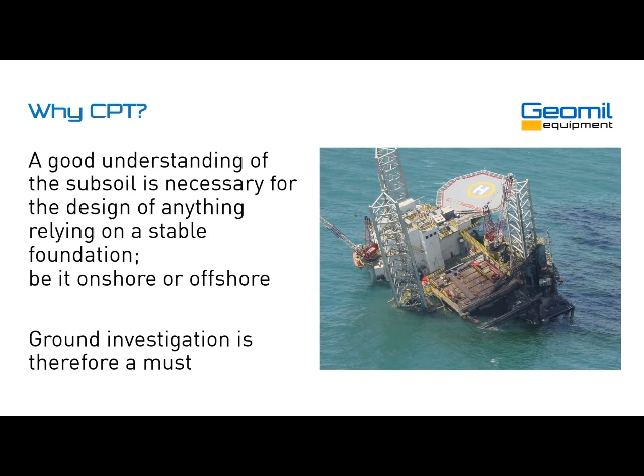So, to start off, why is the CPT important? Why is the cone penetration test important? Well, very generally speaking, a good understanding of the subsoil is necessary for the design of anything that relies on a proper foundation, whether onshore or offshore. This conference focuses on offshore, so we will also focus on that. In short, ground investigation is a must for any construction project.

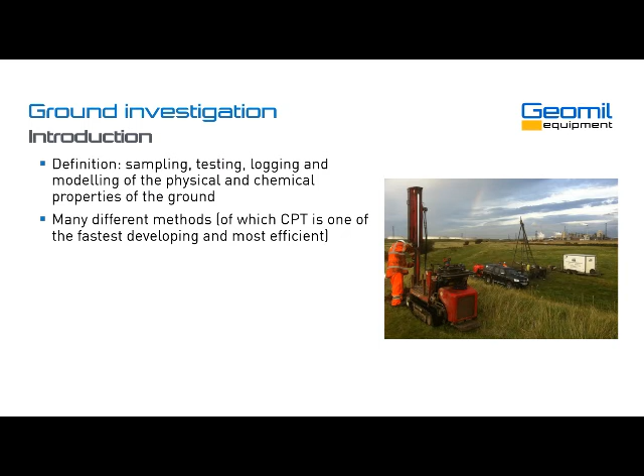If we want to understand the importance of the CPT, we have to look at the bigger picture of ground investigation. If you look at the definition of ground investigation, it is sampling, testing, logging, and modeling of the physical and chemical properties of the ground. There are many different methods to do that, and the cone penetration test is only one of them. It is one of the fastest developing and also one of the most efficient methods.

You always have to keep in mind that the best ground models are created by using a combination of methods. So even though we, as a CPT manufacturer, will obviously advocate for the CPT, it is only one of the methods, and I always say you should never rely on just one method. You should always use a combination.

It's important to keep in mind that ground investigation typically only accounts for a very small percentage of the total construction cost. More importantly, it is wise to invest in investigation upfront, as it will lead to lower construction risk, and therefore, at the end of the line, less cost escalation. So don't be penny wise, pound foolish, but do budget for a proper ground investigation.

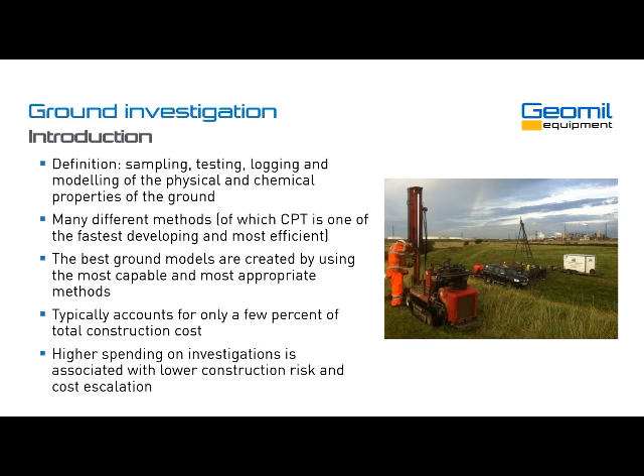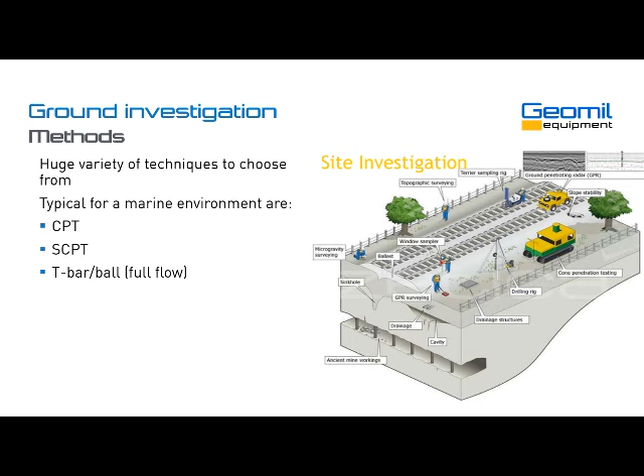Now, once again, there are very many methods for ground investigation. There's a huge variety to choose from, but typically for a marine environment are the CPT, the SCPT, the seismic CPT. Another combination with CPT are the full flow penetrometers, such as the T-bar and the ball, shear vane testing, drilling with coring or sampling, pressure meter testing, packer testing, and obviously also geophysical testing. There are probably quite a few more, but this is a summary of the most common methods.

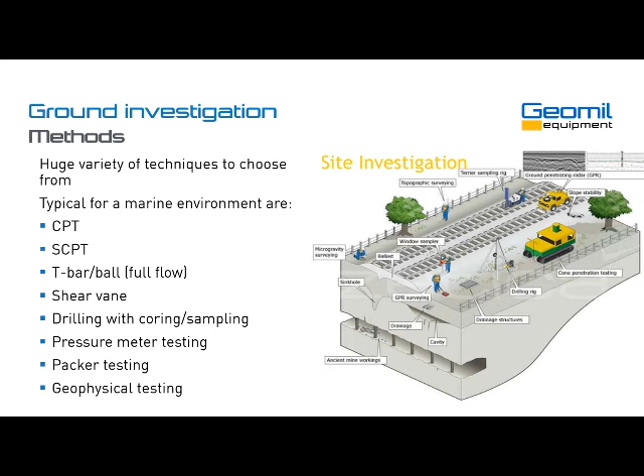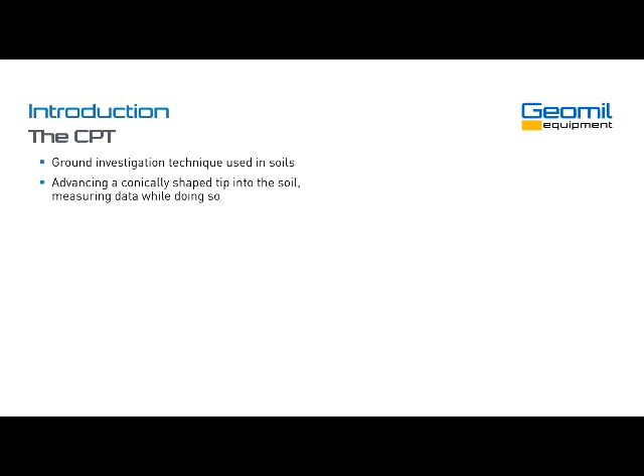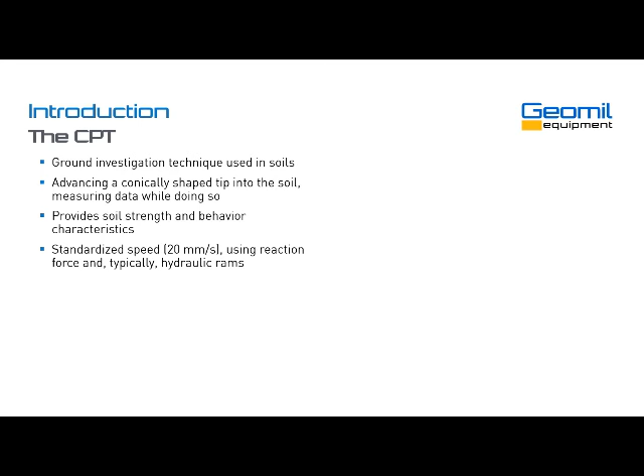Now, for those who don't really know what CPT is, a very brief introduction. The CPT is a ground investigation technique used in soils. It's not suitable for rock, but in soils it can be used. It constitutes advancing a conically shaped tip into the soil at a constant speed, and you measure parameters while you do so. It provides soil strength and behavior characteristics. It uses a standardized speed of 20 millimeters per second. You use reaction force to push the cone into the ground, and typically hydraulic rams, although for some offshore applications we use different technology. But the vast majority of systems use hydraulic rams.

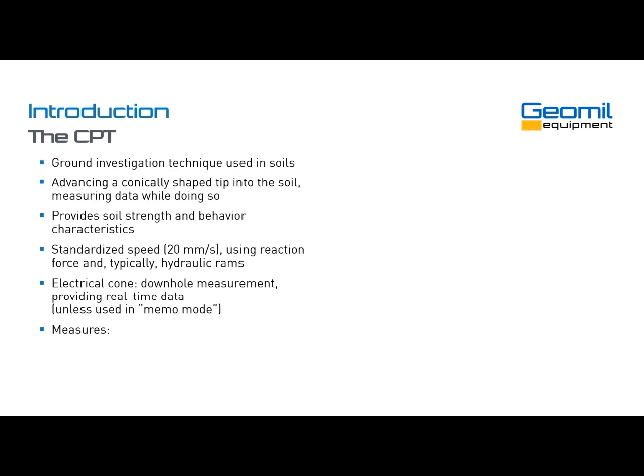We use electrical cones nowadays; mechanical cones are something of the past. Electrical cones allow for a downhole measurement, providing real-time data, unless used in memo mode, which is a special application. It measures three basic parameters: cone resistance QC, sleeve friction Fs, and pore pressure, typically U2, where U2 stands for the filter location. I won't go into too much detail, but the U2 position is typically the default position of the filter.

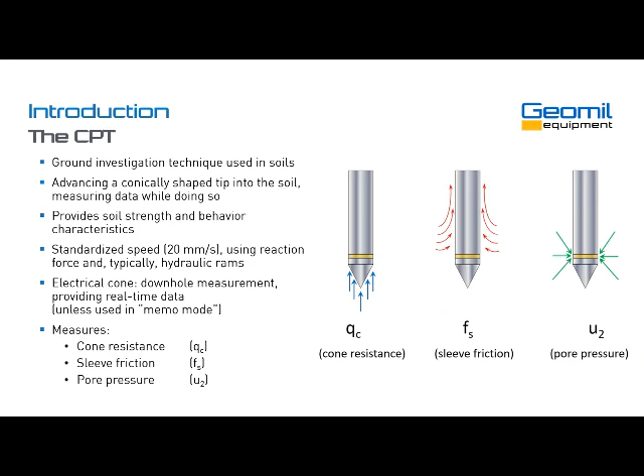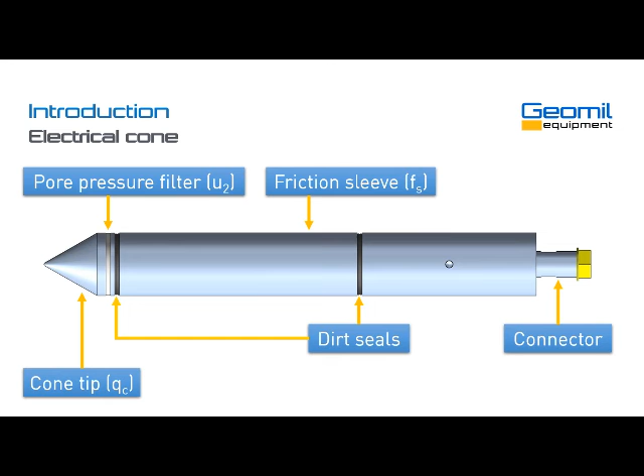Here's a schematic drawing of an electrical cone. You have the cone tip measuring the QC cone resistance. You have the friction sleeve behind the cone tip that measures the sleeve friction or skin friction. The pore pressure filter, as I mentioned, this position is known as U2. And then we have dirt seals between the tip and the sleeve, and between the sleeve and the rest of the cone. They are a flexible barrier that allow the parts of the cone to move, so the cone tip and friction sleeve can move as needed to get your measurements. Finally, at the back there's a connector where you typically connect your data acquisition system or battery pack or things like that.

The advantages of CPT compared to other more conventional ground investigation methods: it's a very effective and efficient alternative, or maybe better said, a complementary method for conventional site investigations such as drilling or SPT.

It's an in situ test, meaning we measure there in the ground where the soil is in its natural condition, without the risk that it is affected by any type of external influence. It provides real-time data, so the moment we do the test, we have the data. It's a big advantage.

It's an established, very well recognized method. It is repeatable, accurate, and reliable, with a big if - if you do it properly and use the right equipment. But that's valid for any test method. You have to do it properly, and have equipment that is fit for the job.

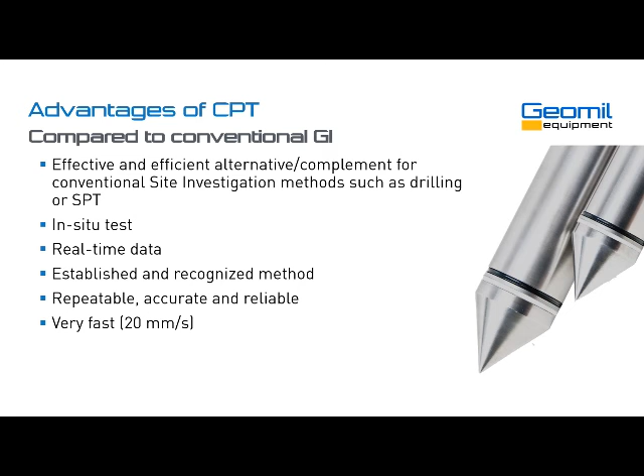It is very fast. There's a standardized speed, as already mentioned, 20 millimeters per second, and this high speed is probably the most significant advantage of the CPT. We can gather an awful lot of data in a relatively small time. It provides very high resolution, very high sensitivity data.

Another advantage is that there's a variety of specialist sensors and add-ons available, such as the T-bar and the ball, seismic measurements, magnetometer, and quite a few more than just these. It's an advantage that you can add that to the normal CPT.

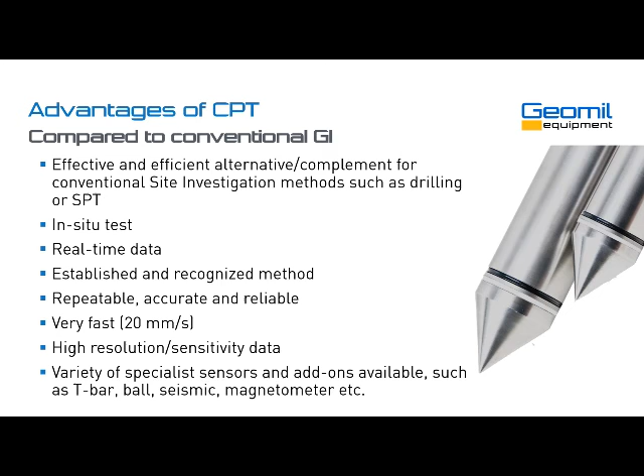Unfortunately, there are also a few limitations. Soil conditions may limit the use of CPT, for example, due to gravel, boulders, or rock. And the depth might be limited due to reaching maximum thrust - you can only push with so much force, and there's a limit to that. These limitations can be overcome with certain other CPT methods, but a little bit more about that later.

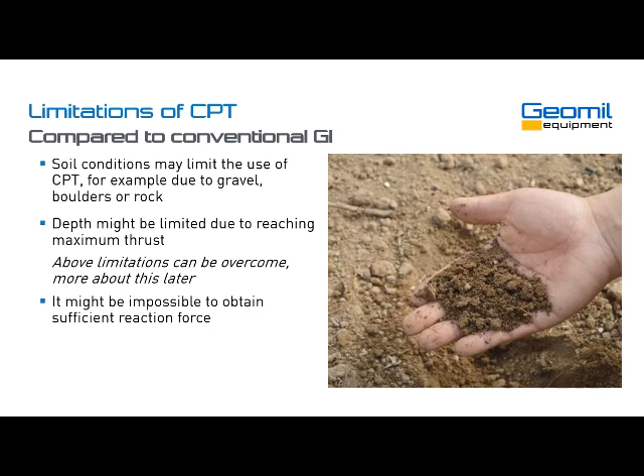It might be impossible to obtain sufficient reaction force. You need a thrust force, and therefore also reaction force, to penetrate the cone into the soil, and it might be impossible to have sufficient reaction force. Usually this reaction force is generated by dead weight, but sometimes it's more complicated than that.

CPT requires trained operators and good understanding, not only among the contractors themselves, but also among consultants and clients. Unfortunately, this is not always the case. So that is a point of attention.

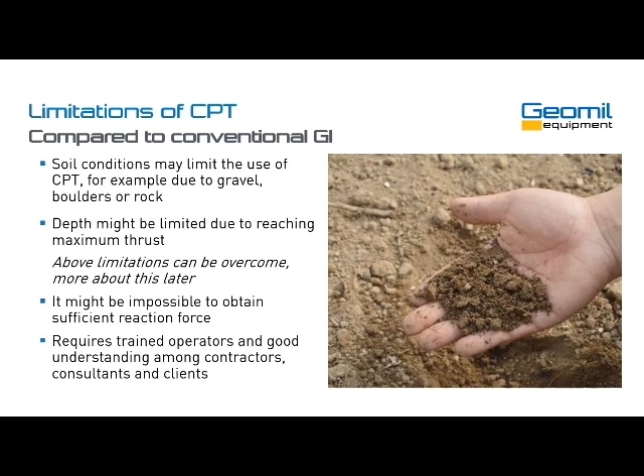Now, if we look at the typical marine environment, what are the projects and applications where we see the CPT? Very broadly, you could say the CPT is suitable for any geotechnical problem as long as the soils being tested are suitable for CPT. But more specifically, the CPT is very common for pile foundation design. The CPT in itself is a miniature pile test, you could say.

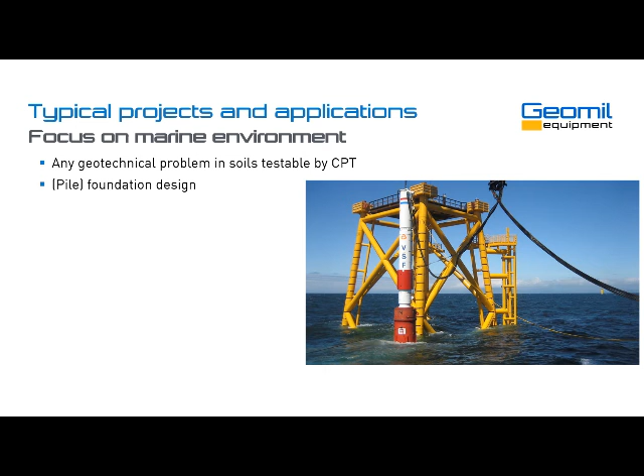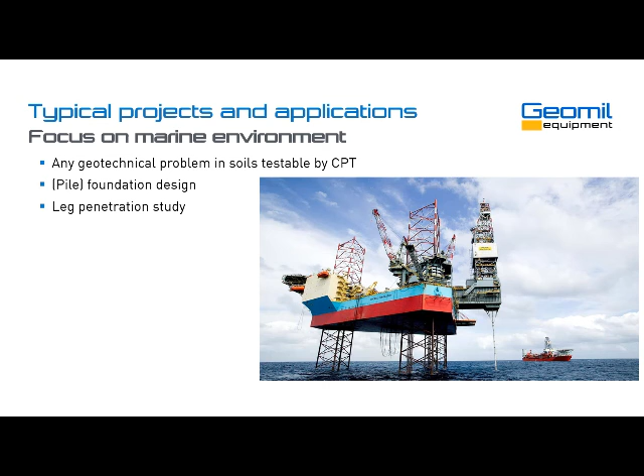Think, in this particular case, of big reclamation projects, such as the Hong Kong airport as a prime example.

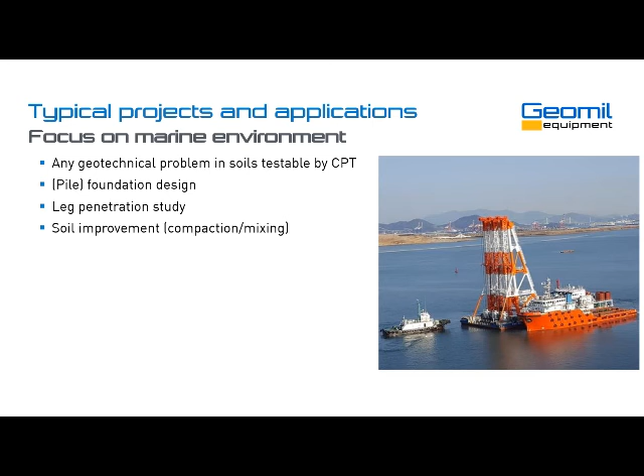Settlement prediction - again a very significant use of the CPT, especially in reclamation projects where a sand fill is placed on often very soft subsoils, and then settlement will take place. It is very important to understand how much settlement is to be expected.

A very popular use at the moment is wind turbine foundations. All over the world we see more renewable energy coming up, and wind turbine foundations are again a very typical application for the CPT.

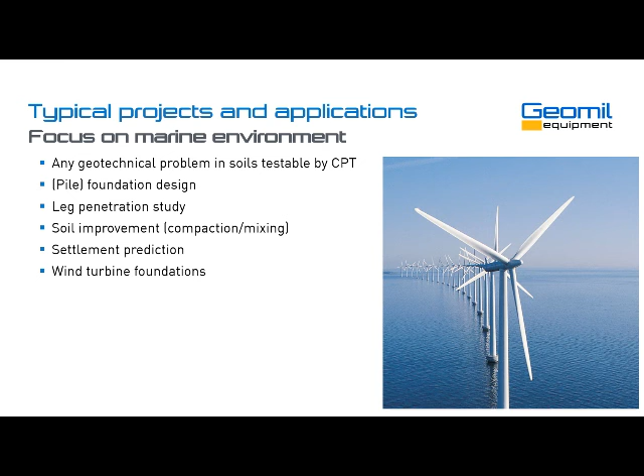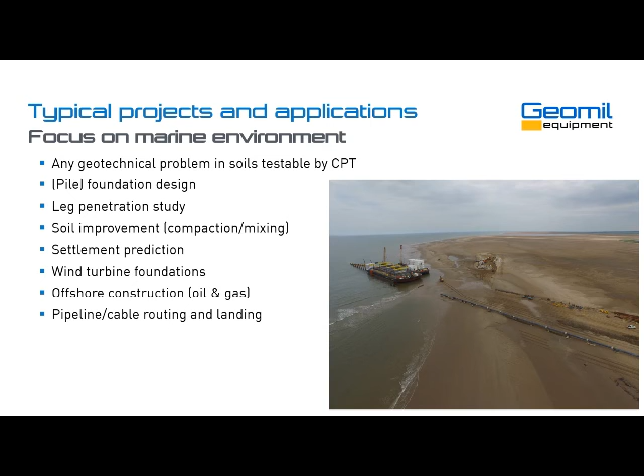Any offshore construction - think of oil and gas structures, platforms, anything you can think of. And of course, pipeline and cable routings and landings, where this sort of infrastructure comes on land. It's a very challenging environment to do testing, but the CPT, being a very fast method, is ideal for this sort of project.

So how does the equipment look like? If you look at nearshore, you can subdivide it into two different categories. There's the very conventional setup where you use a floating barge. The problem, however, with a floating barge is that there's always heave, and this will affect your cone readings - it will affect your pore pressure readings, it will affect your cone resistance readings in particular. Therefore, a floating barge is not really recommended for a standard CPT operation.

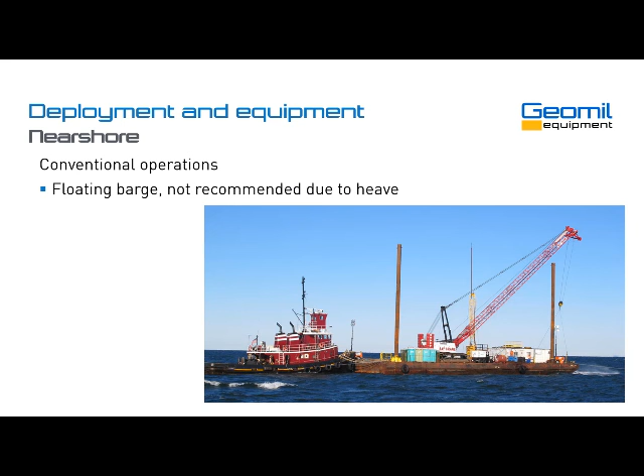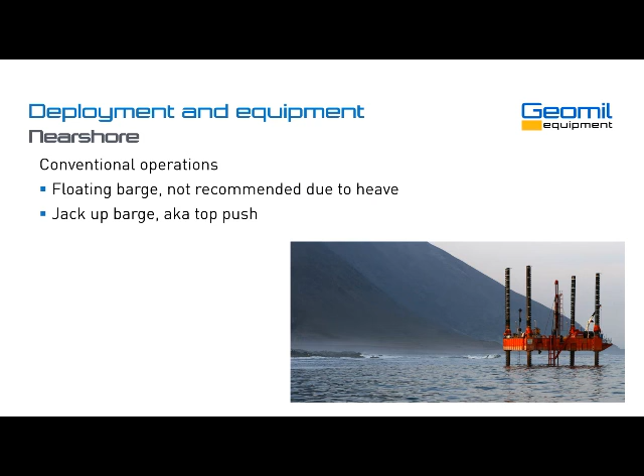So you cannot use an onshore CPT rig, put it on a floating barge, and expect high quality data. In order to overcome this, but still using a conventional method, is to use a jack-up barge, where the effect of the sea is diminished in the sense that heave, tide, etc. do not play any role. There you can use a conventional CPT setup, put it on the jack-up and do your test. This is also known as top push, as it is pushed from the top of the system.

Now, there are also dedicated solutions using a riser system. The Geomil Shark system is a typical example, but there are more systems on the market that use this sort of technology, where you can use a floating barge, but the CPT system itself is independent from that barge. There's a foot on the seafloor, and then a riser construction going to the surface, where you actually conduct your CPT. I have a little video that shows you how this works.

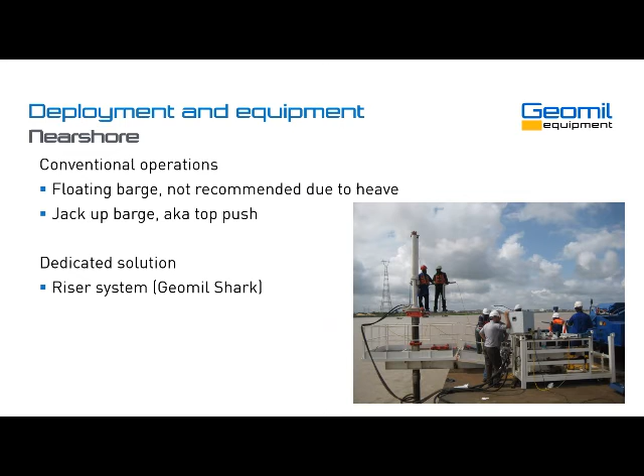Next to these dedicated nearshore systems, there is also an increased use of seabed systems for civil works and wind farms, specifically in areas where there's an awful lot of CPTs to be carried out. This is an example of a seabed unit used for civil engineering work in Singapore.

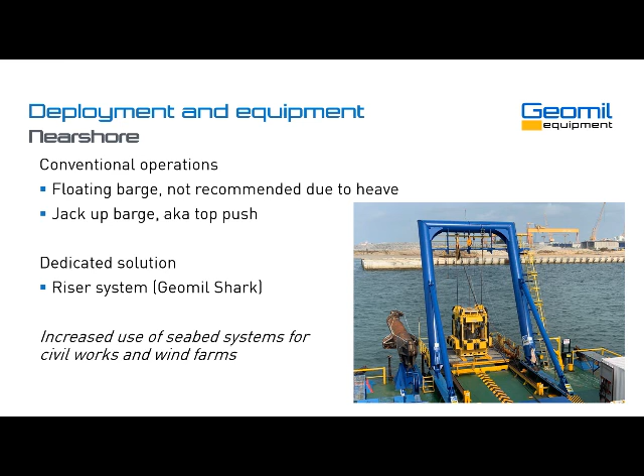If we make the jump to offshore, there are two basic methods. One is the seabed operated system. There are a few systems on the market. We as Geomil produce the Manta system. Our colleagues A.P. van den Berg make a system known as Roson, also a seabed operated rig. Then Datem from the UK supply a rig called the Neptune, but it's more suited towards miniature cones with coil-up rods. And Fugro have their range of seabed operated systems, but they are only for self-use. They don't supply these rigs to the market.

The alternative method is a downhole method where you push the cone from the bottom of a drill string. This is a method you can use to overcome harder layers, rock, gravels, or whatever you think of. Two systems are on the market: the Orca from ourselves, Geomil, and our colleagues from A.P. van den Berg make the Wison system. Fugro again have their own system, but it's not up for sale, there's no commercial use for it.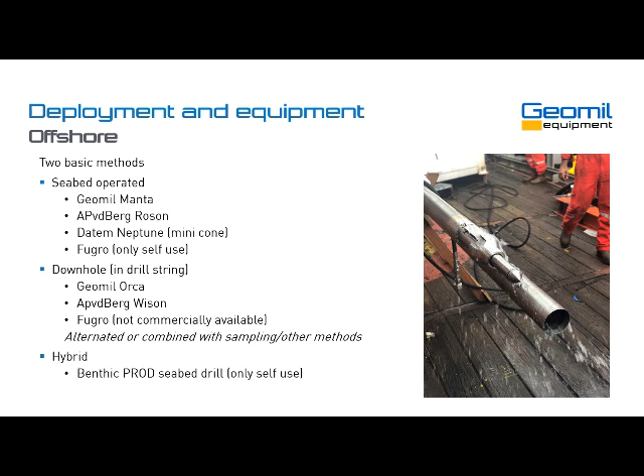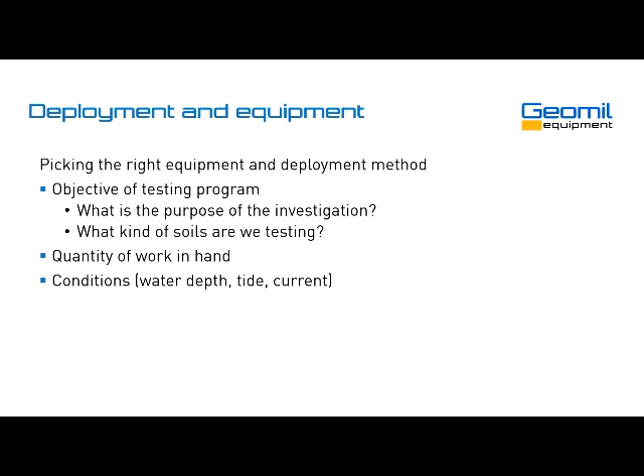Picking the right equipment and deployment method is very important. Keep in mind the objective of the testing program. What is the purpose of the investigation? What kind of soils are we testing in? What is the quantity of work in hand - are we only doing a few tests, or thousands or hundreds? Then you need to look at a different set of equipment. What are the conditions? Think of water depth, tide, current - they will determine what sort of equipment you need to use.

Not unimportant is also what marine plant is available. Finally, experience and quality of operators is also important. Keep in mind, as a summary, you don't need an overkill in terms of equipment, but it's definitely important to have redundancy in this.

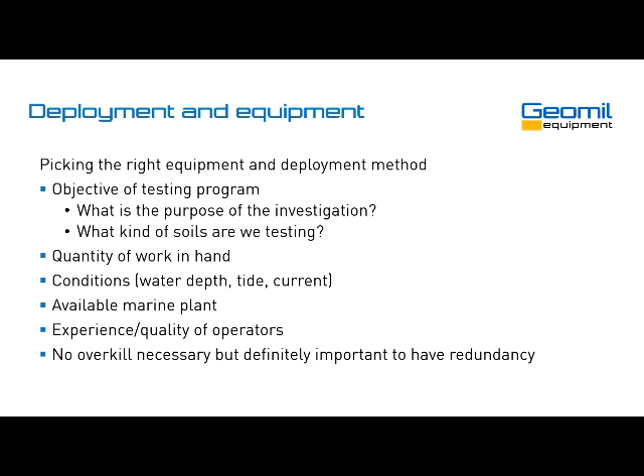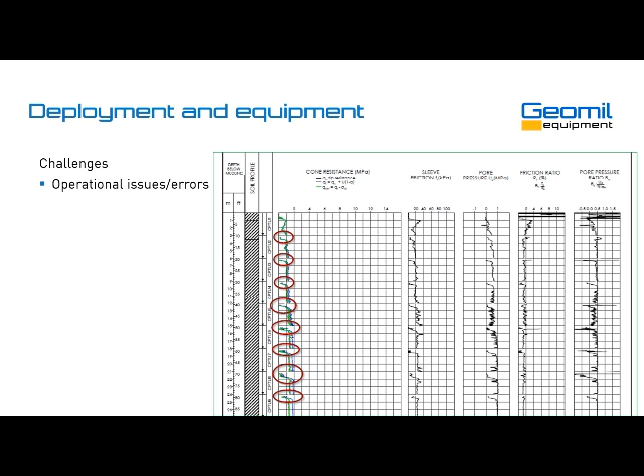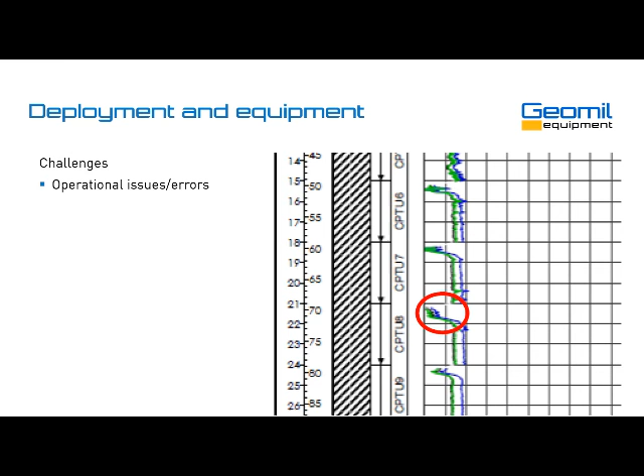Okay, very short, a few last slides on challenges, operational issues and errors. Look at this example. This is a downhole system where you can see short strokes, but if you zoom in you can see that this borehole was probably overwashed, meaning the consecutive CPTs are affected by the borehole, and the first few data samples of these tests are unreliable.

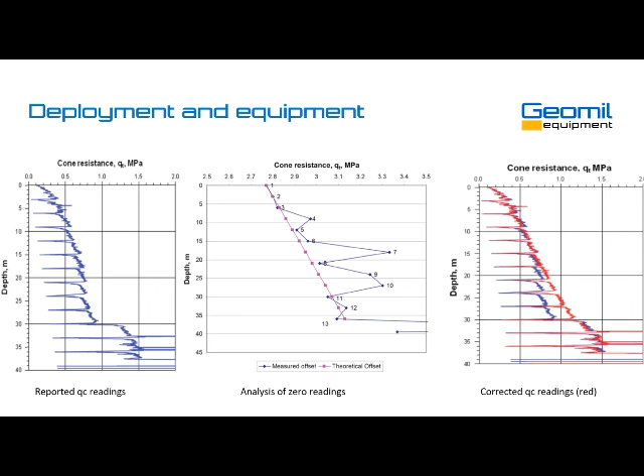Cone condition is important - zero readings and the zeroing location. This is another example. On the left-hand side, the readings as reported. The consultants thought this could not be correct, so they looked at the zero readings - what they were in reality and what they should have been theoretically. On the right-hand side, you see the corrected CPT data. But it's obviously best to try to prevent this sort of thing happening.

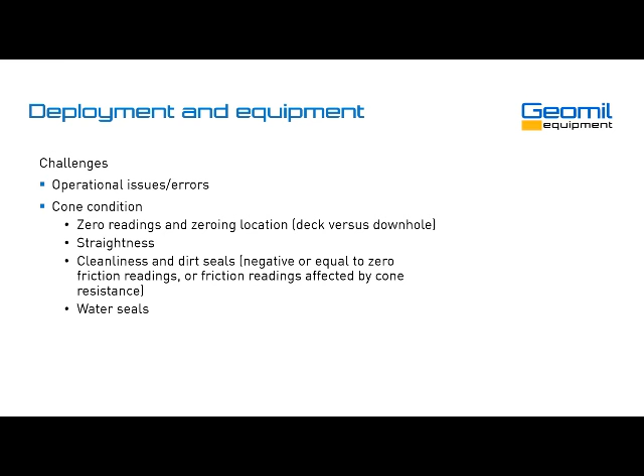Cleanliness is very important, so you can see the dirt seals on the cones are important, water seals, the wear and tear. Piezo cone saturation is very important to prevent sluggish pore pressure readings. Penetration speed is important to keep in mind as well, same as malfunctioning depth measurement, something that is very often overlooked.

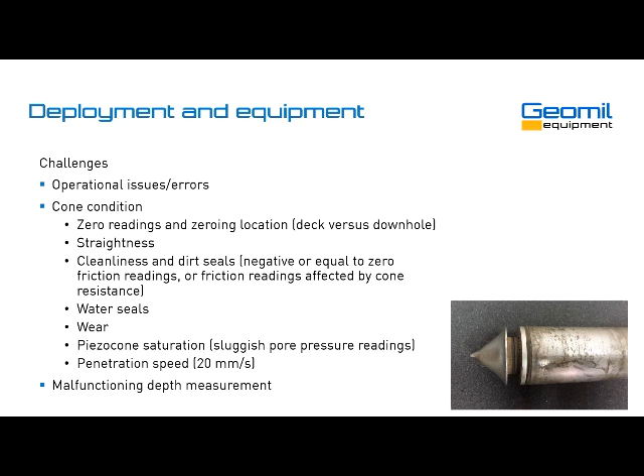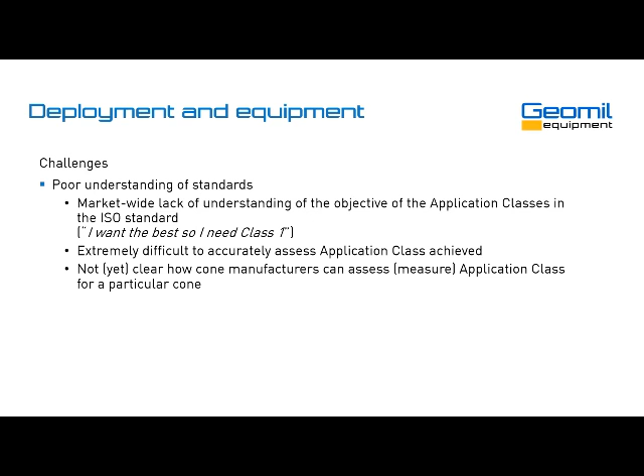What are the challenges we have to deal with? The poor understanding of the standards. Unfortunately, among clients, there's a market-wide lack of understanding of the objective of the application classes in the current ISO standard. People very often say, I want the best, so I need class 1. That's not what the application class is meant to be. It's extremely difficult to accurately assess the application class achieved for a CPT, and there's not yet a clear understanding of how manufacturers like ourselves can assess or measure the application class for a particular cone.

Unfortunately, there's too much reliance on experienced drillers or untrained workers all over the world. CPT operating companies are cutting corners, unfortunately, and therefore not adhering to quality standards. Sometimes these same companies also choose cheap, low-quality equipment, and that obviously results in lower quality data.

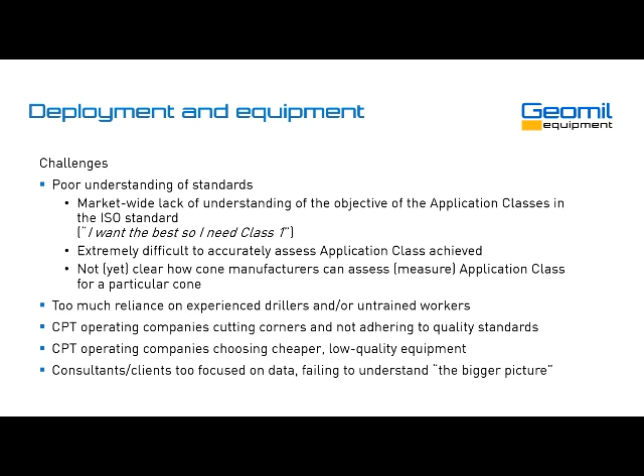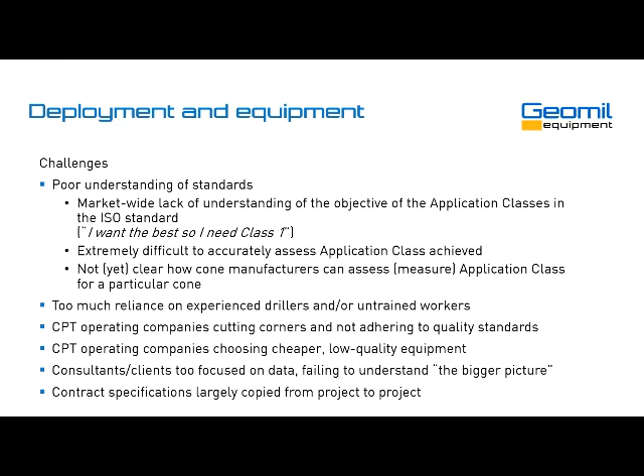And finally, what we see on a daily basis is that consultants and clients are too focused on the data - too focused on a friction ratio three positions behind the decimal point - but they fail to understand the bigger picture of ground investigation. Something else we see is that contract specifications are largely copied from project to project. This was a very brief overview.